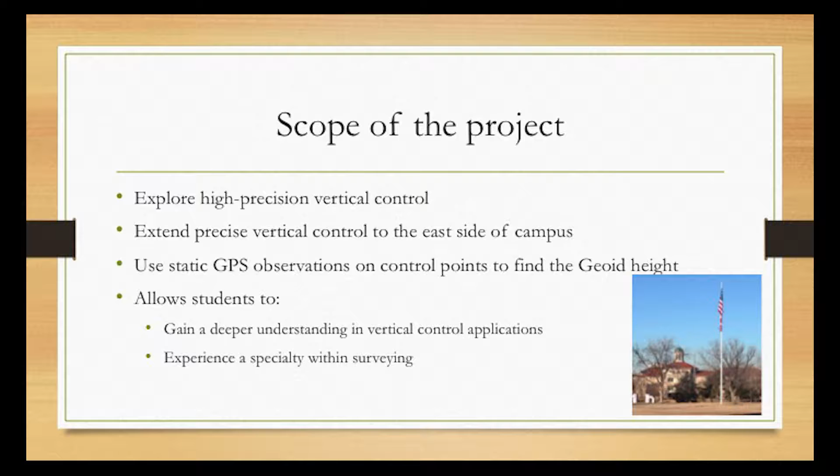But talking about the scope of the project, like I mentioned, we wanted to explore the high precision vertical control. At the same time, we already have a control system or a network set up out there, but we wanted to extend it to the east side of the campus. And at the same time, we use GPS observations on these control points to find the geoid height. And right there, it allowed us to gain deeper understanding of vertical control applications and experience a specialty within the surveying.

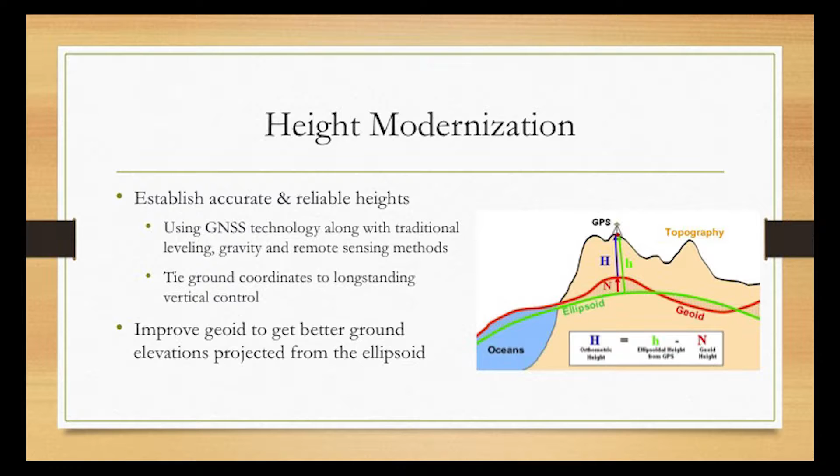And like I mentioned, the high precision vertical control takes us to this height modernization, to understand it a little bit better. I'm just gonna go over the slide. I'm pretty sure you guys have seen that illustration before. But this height modernization establishes accurate and reliable heights using GNSS technology along with the traditional leveling that we're used to, gravity and remote sensing methods. Also tie the ground coordinates to long-standing vertical control, which is what we did, extending the network that we already had on our campus. Also, it improved the geoid to get a better ground elevation projected from the ellipsoid.

Talking a little bit about the control that we use, at NMSU we already have a vertical control network. Some students started this project back in 2010, and they brought the first order control to NMSU with the epicenter being in the middle of the campus at Reilly. You can see that on a poster, or you'll see it on the slides later on in the presentation. There were 3 previous loops that we tied into Reilly, A245 and H245.

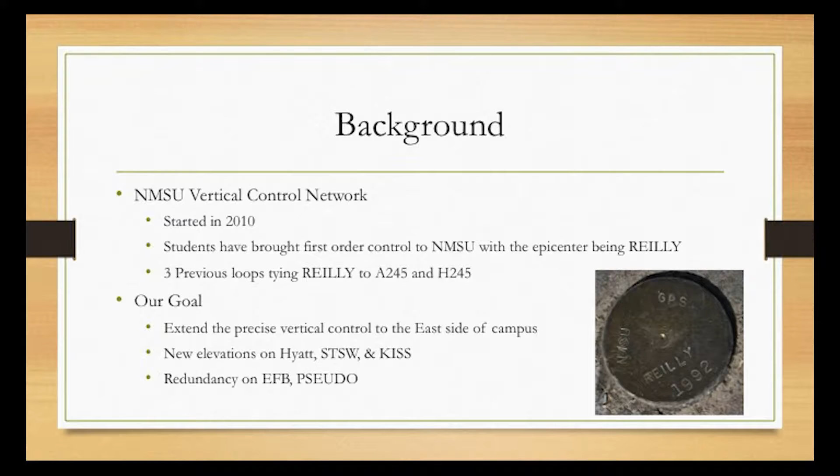And our goal, like I mentioned before, was to extend this vertical control or the network to the east of the campus. Also, we got some elevations along some other benchmarks that were along the way, and we got redundancy on a couple other benchmarks that we have. And these are the control points right there.

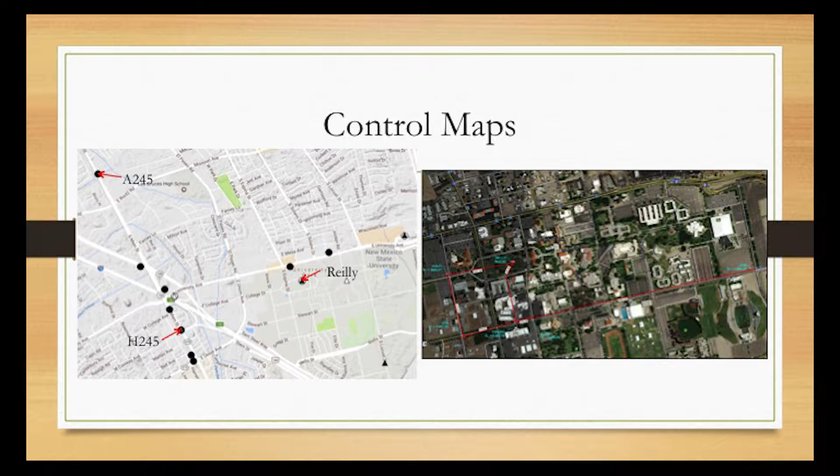This first one right here, these are the first 3 points that we use, the A245, H245, and Reilly. This is the center of the campus, which is right there. And our bench loop, we ran it from here, we went west, south, and east towards the campus. And then of course we have to run it back to check into Reilly. Those are our control maps. I'm gonna pass it on to the next student.

Our first thought was we'd do a first order class I level loop. And then we also decided we would take GPS observations on both Reilly and Kiss, the beginning point and the top point up by the Pan Am Center at essentially the middle of our loop.

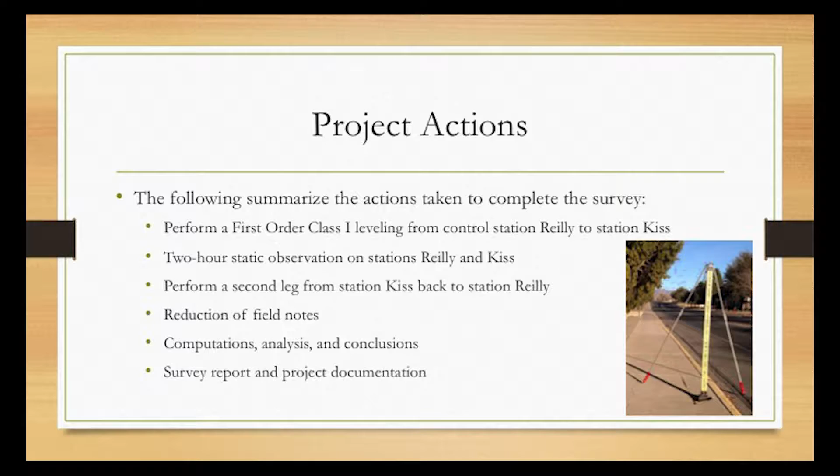The field notes were processed by Garrett, and we went through the computations with an Excel spreadsheet. We analyzed them, we compared them to the standards for a first order level loop, and then we got the project ready.

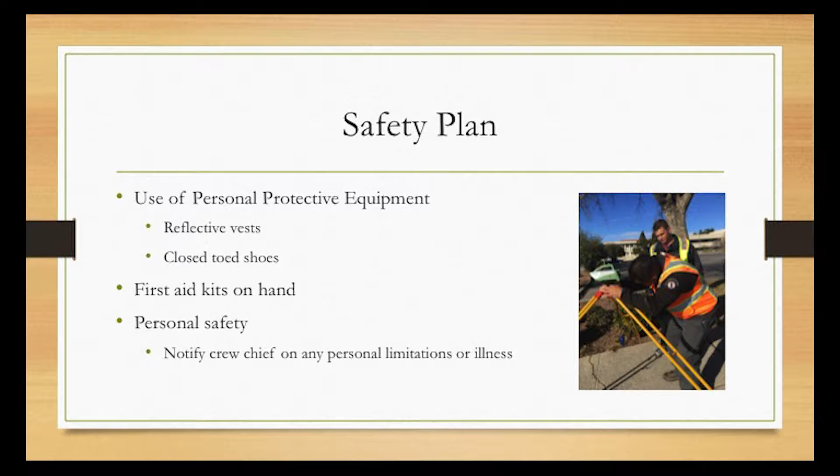In New Mexico, there are many problems with surveying outside for a long time. And the general needs for any surveying crew: you need reflective materials, so if you get in traffic, which we had to, you are visibly seen; first aid, so if anyone is injured, you can take care of that; and personal safety. It can get very hot in New Mexico, and we'll speak more about that.

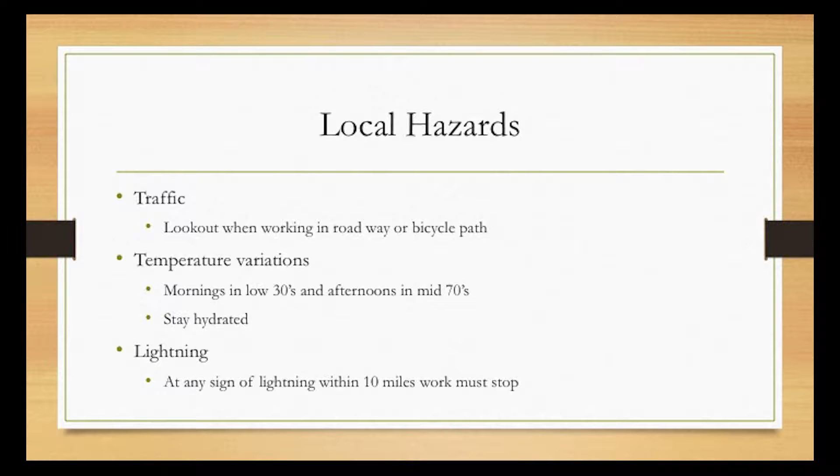Traffic: fortunately we did our project during the off-season between semesters, so there was not as much traffic as there could have been, but because at NMSU they still had students on campus and they still were having local events there, we had to keep an eye out for the traffic.

The temperature variations: you start out in the morning wearing a sweater and you leave in the afternoon wearing a t-shirt. Fortunately, it was in early January when we did this, so it didn't get to the extreme levels of heat that it can in the summer, which can be upwards of 100 degrees. Staying hydrated even in that time of the year is necessary because we do live in a very, very dry climate, and getting dehydrated is a very high possibility.

Locally, we have a standard of if there's lightning within about a 10-mile radius of an event, sporting event, anything, you need to shut down and wait for about 30 minutes for hopefully the lightning to move away. We didn't have any lightning or any storms that day, but if we had seen lightning, because we are using Invar rods, it would have been very prudent to quit that day. Next slide, please.

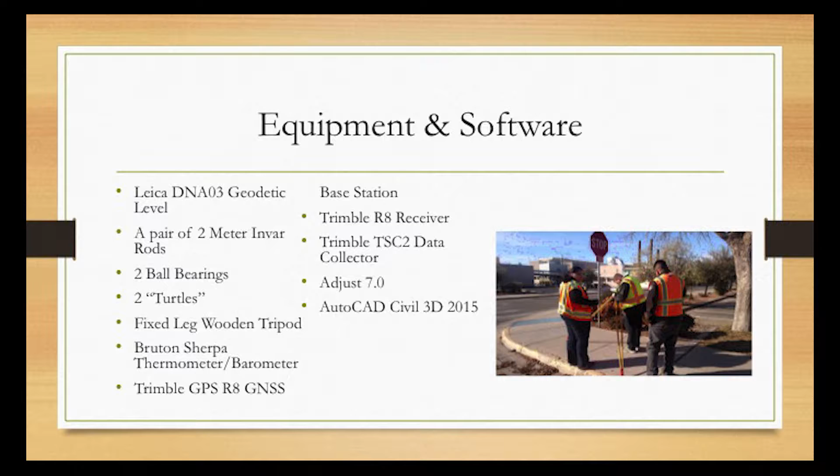We used a thermometer and barometer, which we took measurements with when set up at each point. We also used Trimble stations for our GPS. We used Adjust for our least squares adjustment, and AutoCAD, which we use for our poster and to make everything else look nice and presentable.

So the regulations for our first order class 1 loop: the difference in foresight and backsight would never exceed 2 meters. The maximum sight length due to earth curvature is 50 meters, so we did not exceed that. The minimum ground clearance is 1/2 meter. The maximum loop closure is displayed with this equation.

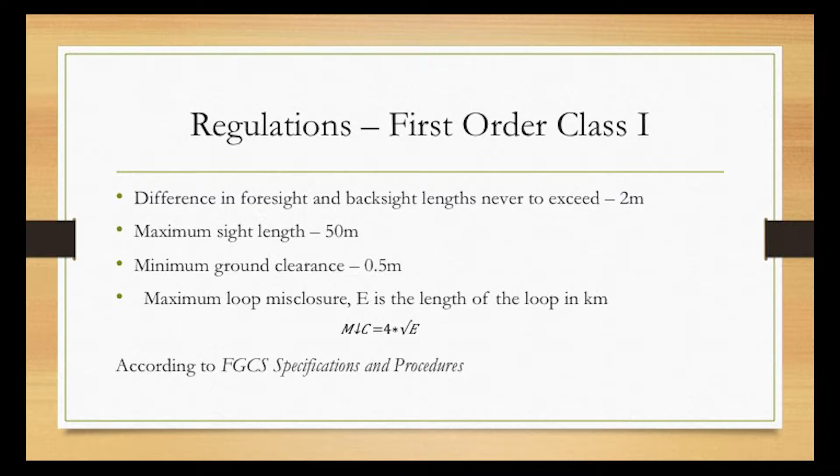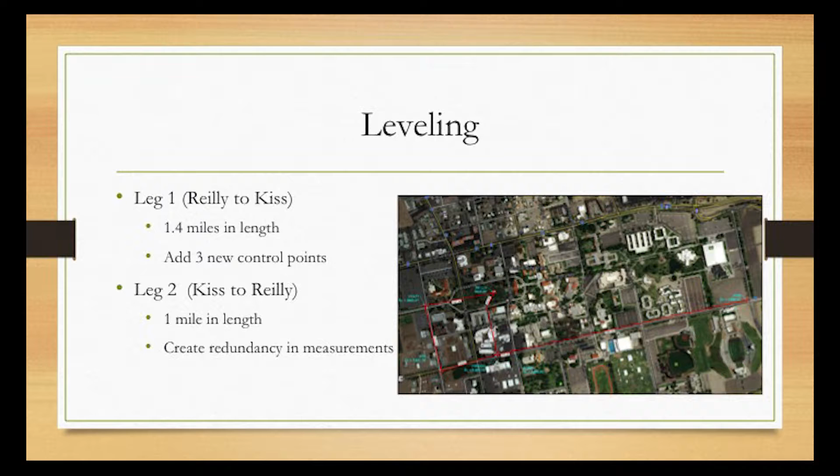So our first loop, like Berto was saying, ran from Reilly to Hyatt, down to EFB, to Pseudo, to STSW, and then up to Kiss. That was 1.4 miles in length, and we added 3 new control points. The last level loop ran from Kiss, back to STSW, to Pseudo, and back to Reilly. And that was 1 mile in length.

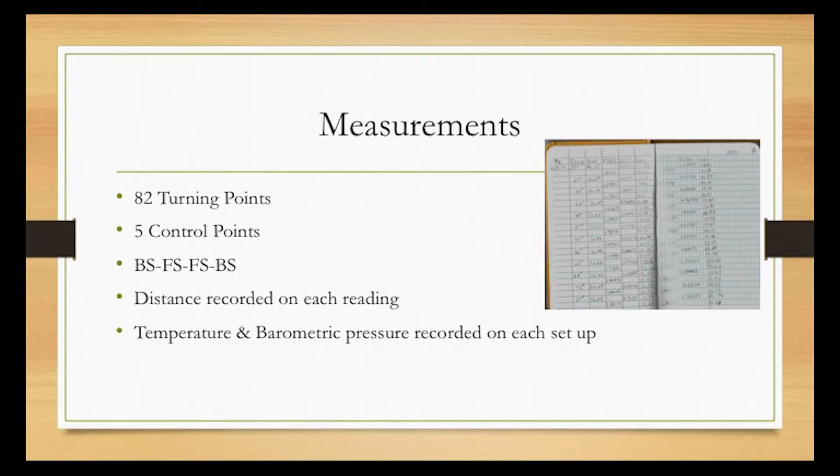So for our measurements, we had 82 turning points, which is a lot. We had 5 control points. We did backsight, foresight, foresight, backsight, so that we would only have to do the loop once. We don't want to do it twice because it took 16 hours to do both loops. We recorded the distance of each reading. We did this because our data collector failed, so it was good that we had a backup plan to make sure that we had all our distances recorded. We used the temperature and barometric pressure recorded on each setup. We didn't really have to do that because we had the Invar rods, but that's still one of the requirements for a first order.

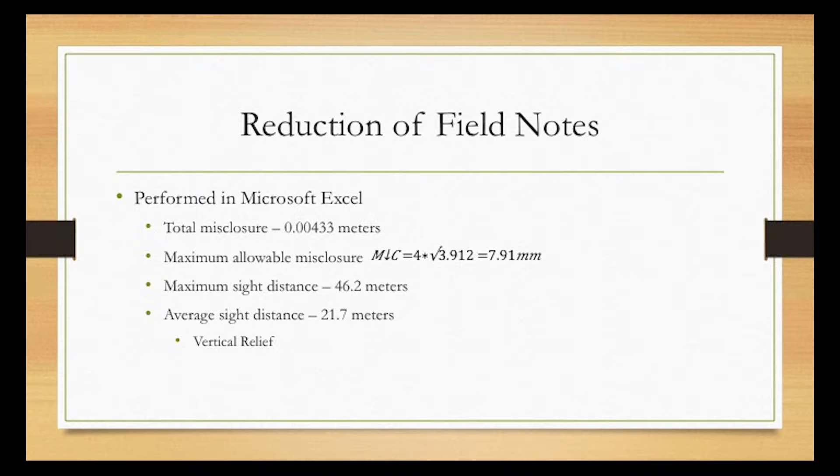So then we did the reduction of our field notes. We ended up with a misclosure of 4 millimeters, and that falls under our maximum allowable misclosure by a factor of like 0.5. Our maximum sight distance on all our data points was 46.2, so we never hit the 50. Our average sight distance was 21.7, which is extremely short, so it did take a long time. And it took a long time because we had a lot of vertical relief. We were going uphill the whole time.

So this was a pretty cool part because the underclassmen have never seen or heard of a least squares adjustment. So myself and Berto took it on us to kind of show them what we're doing. We used the Adjust program that's free for educational purposes. We held H245 and A245 from the previous loops that students had run. They're located on the railroad, and it's about the closest first order control in the area. A245 is 3 miles from campus, and H245 is about 1.5 miles.

These loops, this is a non-weighted solution. It's minimally constrained. We did non-weighted because we used the same procedures as the previous loops had done. We used the same equipment, and since we balanced our foresight and backsight, we really didn't see a reason to weight it.

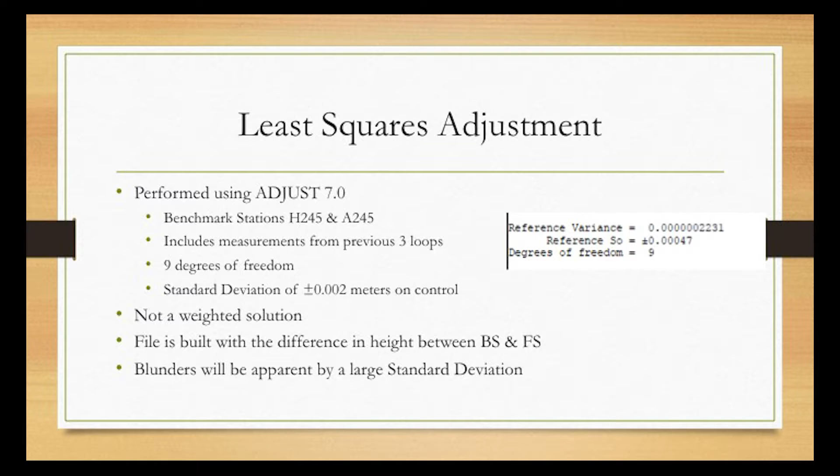We built it. If anyone's used Adjust, it's a great program, but it's kind of tough to use. In our calculations, you can't just input foresight, backsight. You've got to get the height difference between each shot. But Adjust also allows you, if you have a large standard deviation, you've got a blunder somewhere. We had a couple pop out.

We went back. Since our data collector was not working correctly, it ended up just being input into Excel. We put the wrong numbers. We were able to tighten it all up. Ended up with 9 degrees of freedom, a standard deviation of about 2 millimeters on each point. Then we went back and did static observations on all of the points.

Now the NGS, in order to have a solid first order static observation, you would have to do 3 sessions, 4 hours each over a 2-day period. We just didn't have the time and the resources to do that. So what we did was a 2-hour static observation on the start of our loop and at KISS, which is where we turned around and came back. We processed it through OPUS, and Reilly has a first order ellipsoid height already established.

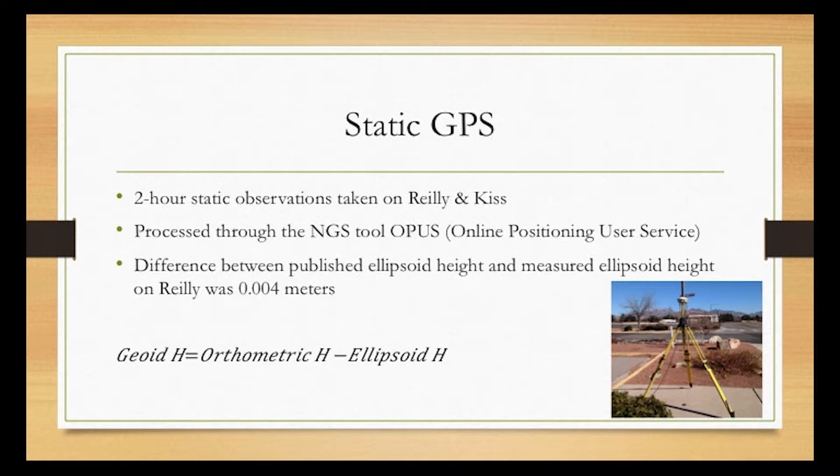So it was kind of neat to see that with just a 2-hour, we hit within 4 millimeters of the published elevation. Kind of gives you a little comfort when you're using OPUS in the field, running RTK. You just want to get a relative elevation while you're there. It's pretty close. It allowed us to find the geoid height, which was the orthometric height that we leveled, minus

the ellipsoid height. And you'll see that over the distance of just over a mile between Reilly and KISS, it's about a 2 centimeter difference in the geoid. Between the elevation on Reilly and the elevation on KISS, there's a difference of about 2/10 when it's projected up to the orthometric height in your GPS. So it just kind of shows the impurities with the geoid. You can trust it over a short span, but 2/10 in less than a mile, it's more of a relative if you go ahead and use OPUS.

It looks like I lost the battery.

Our standard deviations are 2 millimeters on almost all of our points and about 3 millimeters at KISS, but that's at 1 sigma, so to have that 95% confidence interval, we would do it at 2 sigma, so it'd be 4 to 6 millimeters on each one. That's pretty good for the distance of our loop and the span that we've done this.

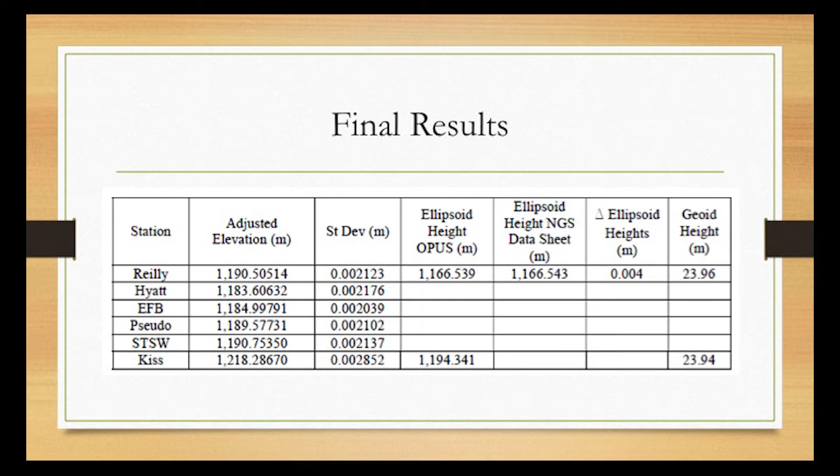Some of the challenges with this project: one of the requirements is to have a collimation, a C-factor test, performed before and after each day. And you need to fit within 5 seconds on your results. And we couldn't get it below 5.5 seconds. And I spent hours adjusting that sucker.

Being university equipment, someone's used it and stripped one of the nuts on the bubble. And we did not have the time to send it in to be serviced. So I was able to get it down to 5.5 seconds. That was about the best we could hope for. I did do it every time we set up and tore down.

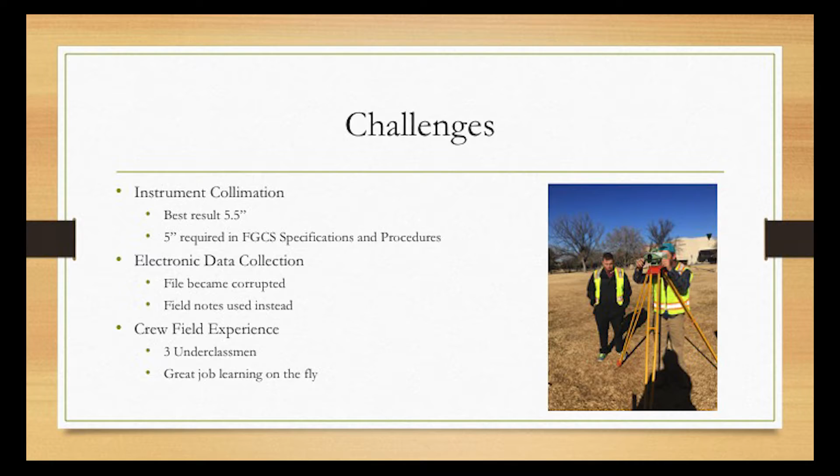Electronic data collection: getting university equipment, someone changed some settings. We got out there and didn't realize it. The file became corrupted. But because we took field notes in the field book, we had the backup, and we didn't have to restart.

The biggest thing was the field crew experience. I've been surveying for about 5 years. Bertha's done it for 20, and the rest of us are real low on experience, real low on the education. But we didn't see that as something that was going to hurt us. We saw it as a learning opportunity.

This is something I've never done. I thought it was just a level loop myself. Turned out to be a lot more, going through the specs, going through the adjustment. It was a good learning curve for everybody, and we tried to bring in the younger students and encourage them. At first, they kind of didn't want to do this. I think overall that was the whole point of this project, to teach everybody a little bit.

So some of the things we learned: is this really a first order class 1 control? If you're going to go check by check on the list, no. We didn't meet all the specifications. There's pages of them. Some of them we just could not meet, such as the C-factor test. We chose the ones that we felt were really important to us, and we worked really hard to meet those. So even though it's not necessarily first order class 1 on the checklist, you can trust these points with a 95% confidence at 4 millimeters at our farthest points.

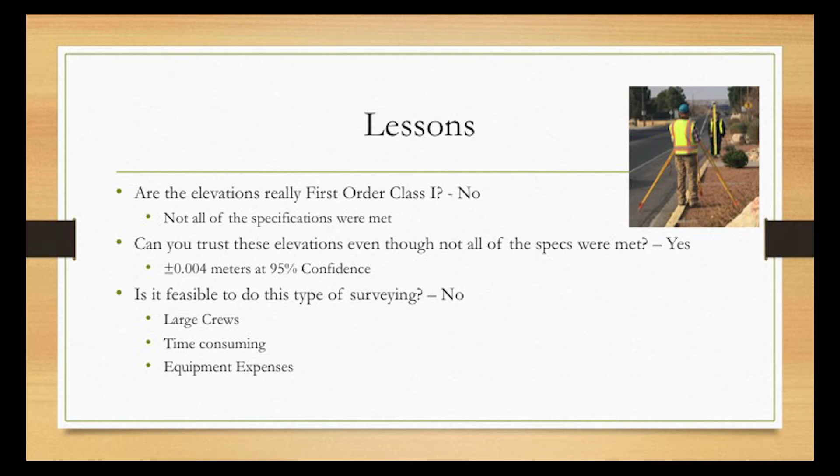The other thing that we learned is there's a reason NGS is no longer going to supply us and maintain our vertical control network. And it's because it requires the large crews. It was time consuming. We spent 16 hours in the field running a 2-mile loop. And the equipment is so expensive. The rods are $9,000 a piece. The level's $5,000. The rod can't be scratched on the bottom. They have to be certified. It just turns into a large hassle.

And it's not necessary anymore if we can maintain and build on height modernization like the NGS objective is. Hopefully we can improve the geoid model, include remote sensing, and these steps are no longer necessary. They can be performed by a specialty, and it's just not economical anymore.